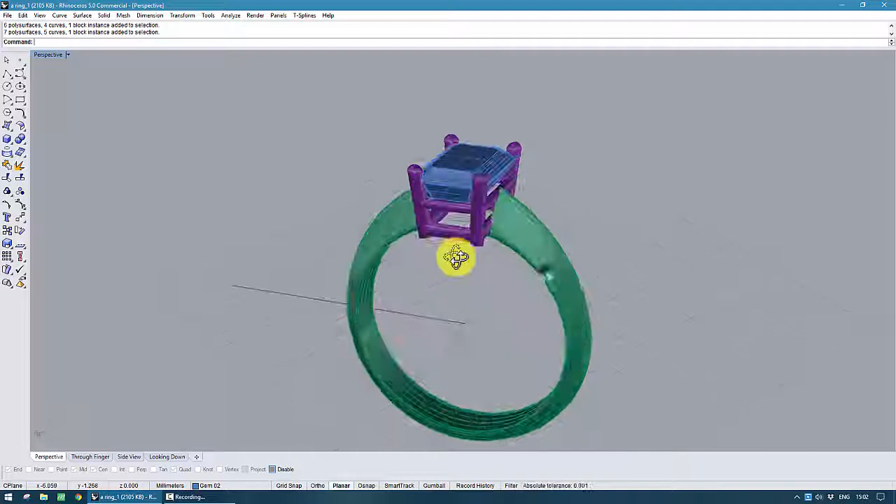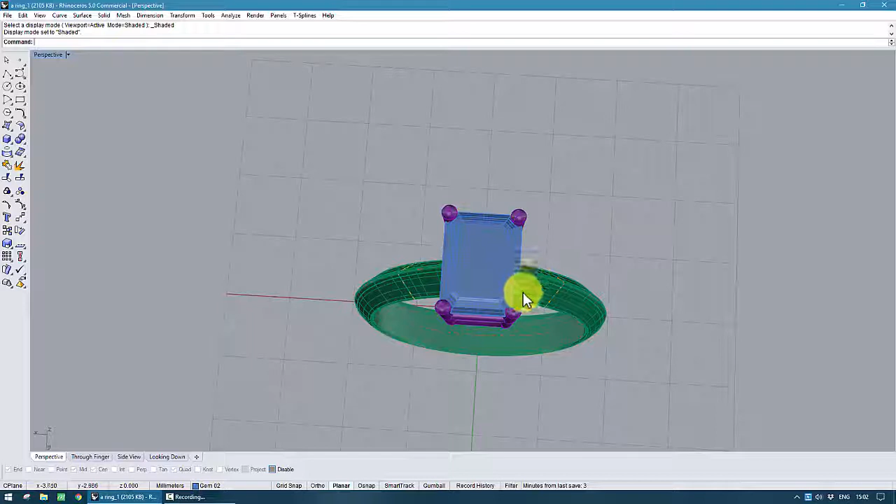I found this CAD file on a website. You know there are websites where you can download files for free, and someone was selling this. As I said, this is not a CAD tutorial, I'm just using this file. I actually bought it because I want to show you how a bad ring looks. This is not about whether I like it or not.

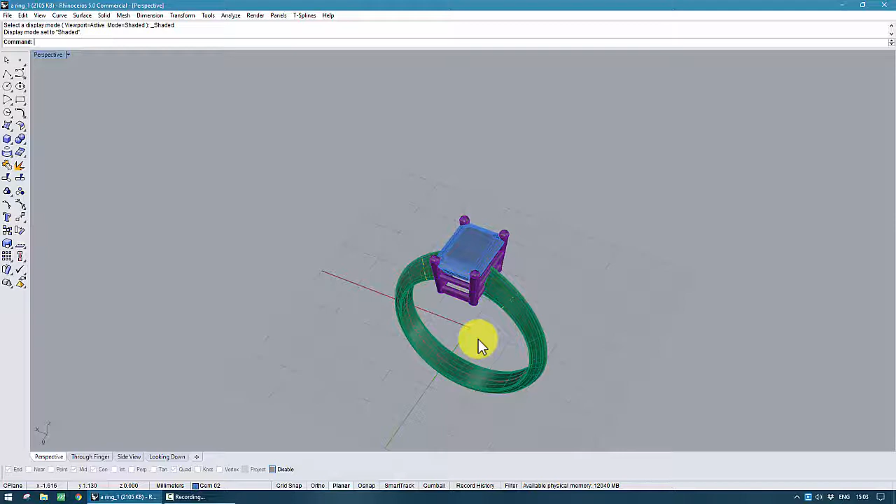The video I'm gonna make today is from a technical point of view - why this ring, in my personal opinion, is wrong. I'm not criticizing anyone's work, I'm not gonna say who did it, I'm not gonna write down any names. I don't know who did it actually, so it doesn't matter. Why do I think, and again this is my personal opinion, that this ring is wrong?

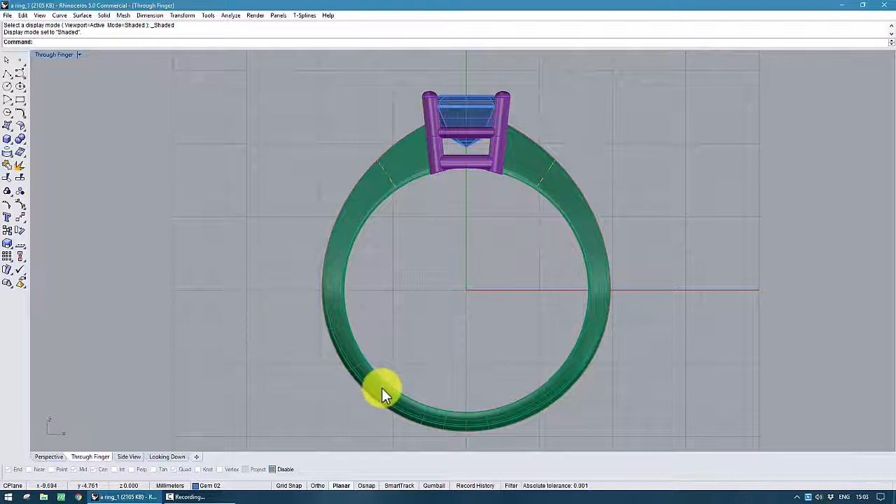Several things. First of all, if you look at the shank, it's not the first thing that is wrong, but you can see that it's very thin. This file I assume has been done in Matrix because of the gems layout. It doesn't really matter, as I said, this is not a CAD tutorial. I'm just using Rhino because I got this file in Rhino format, so I could use a whiteboard to show you.

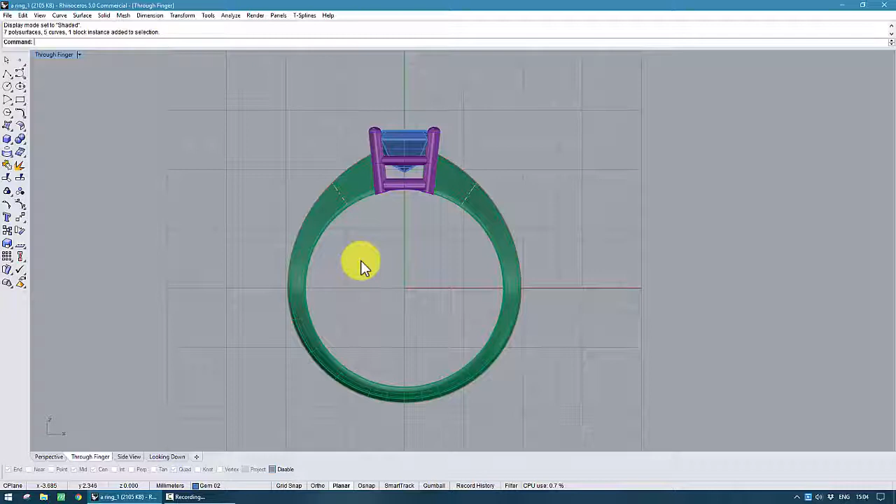Why do I think it's wrong? First of all, as I said, the thickness of the shank. Let's measure this - line dimension. Let's see, this is 1.3. Right, 1.3 on the CAD is gonna be 1.1 once it's cleaned up and polished. So in my opinion, it's too thin.

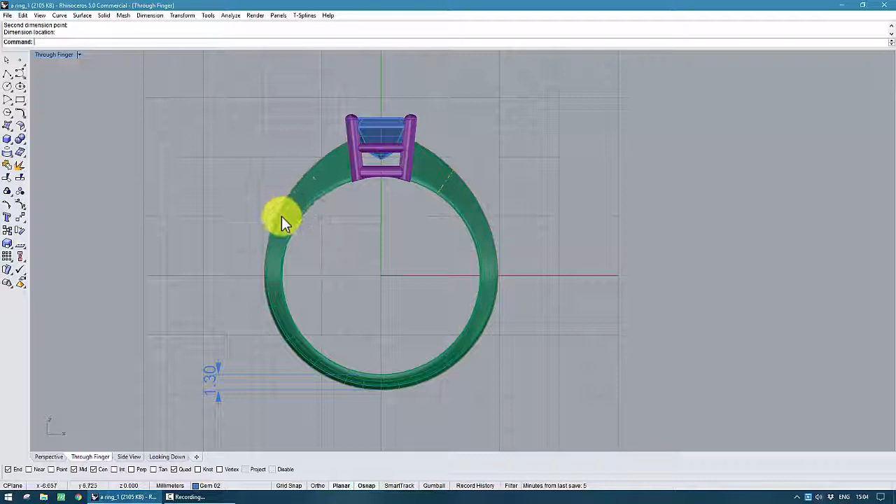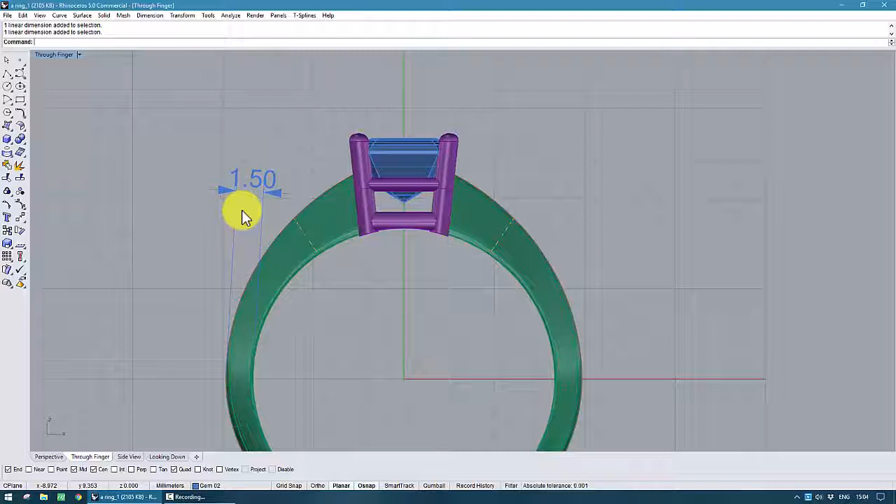If you check the sides, 1.5. Again, 1.5 is going to end up being 1.3. I usually would not make it less than 1.5 on the final piece. So when I made the CAD file, I tend to use 1.8, some 1.6 I would consider thin already. It's not like super bad, but it's too thin anyway.

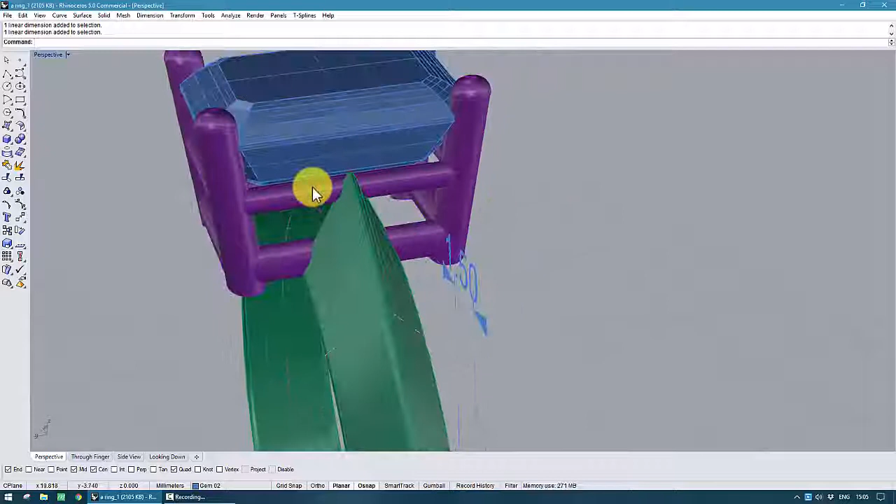What else is wrong here? You can see the way this joins to this, it's just too thin. Overall the whole model is flimsy, so this setting is just too thin everywhere, so the stone is not really secure. It's quite likely that the setter might not even be able to set it properly. If you see the claw, it's like too far inside the stone.

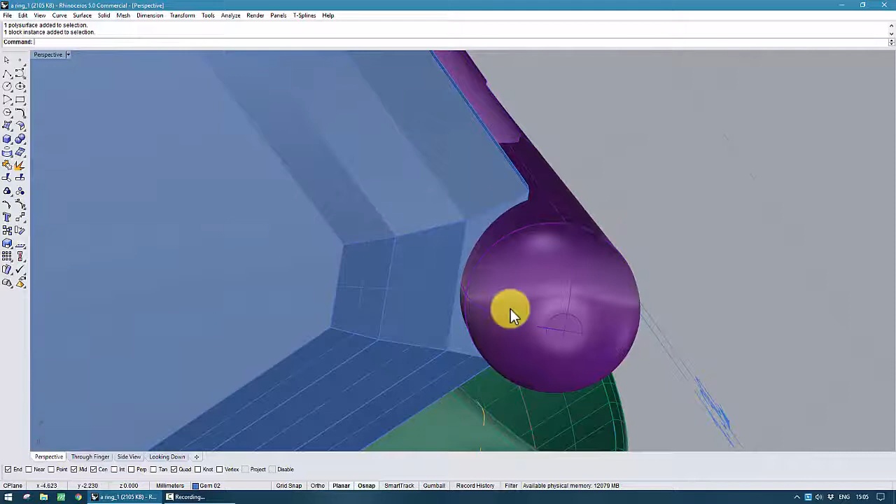It doesn't need to be. Like that should be fine. You have to bear in mind that the metal contracts, the ring always shrinks a little bit. So this is usually how I would do it. Like that is way too much.

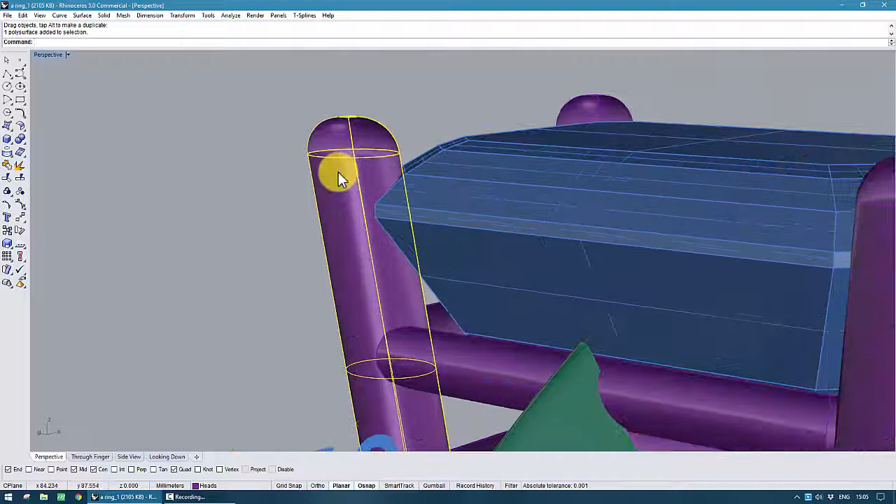The problem you could find is that once the setter is setting it, the setter needs to remove a lot of metal. So once the setter is setting the claw, you will end up with a little bump here. So that's just not nice, it shouldn't be like that.

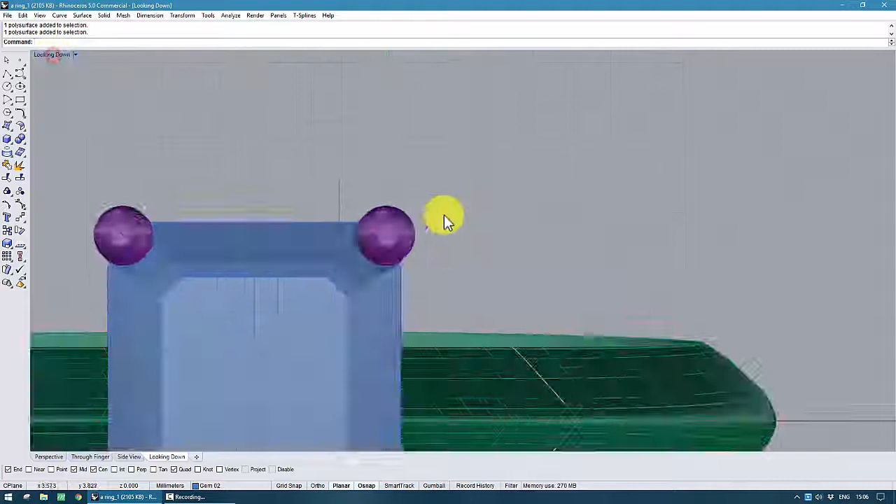The thickness is alright, I think that's gonna be like 0.8 or something like that. Dimensions, line dimensions. 1.1, so it's alright. In terms of thickness, it's alright.

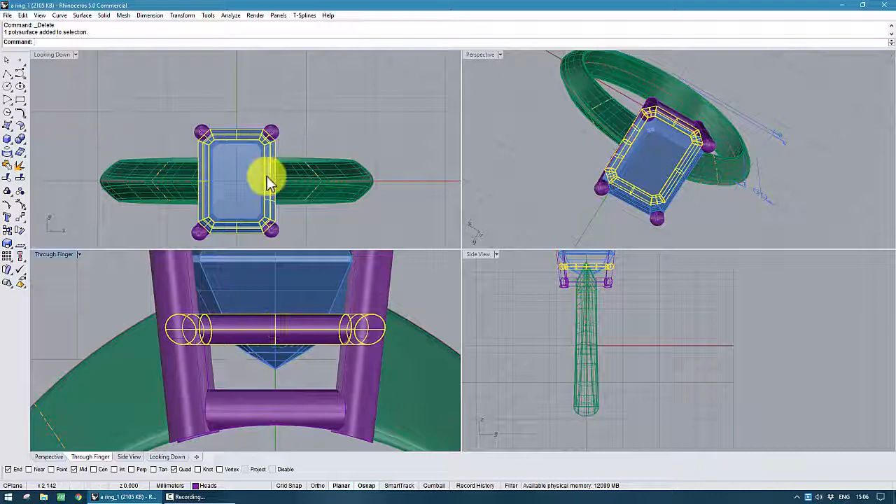What else? We talk about the thickness - when I was on perspective, this way should be a bit thicker, but it should always be thicker this way. So I'm not editing the file properly now, I just want to show you what I would change. This should be thicker.

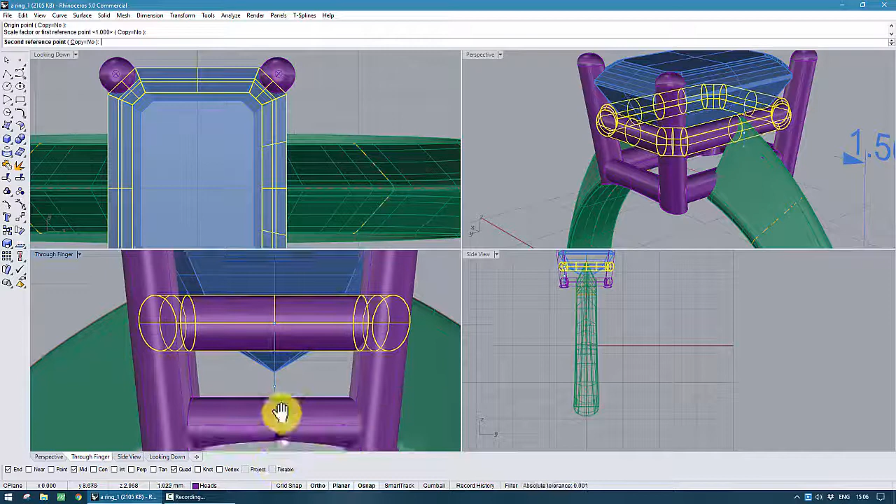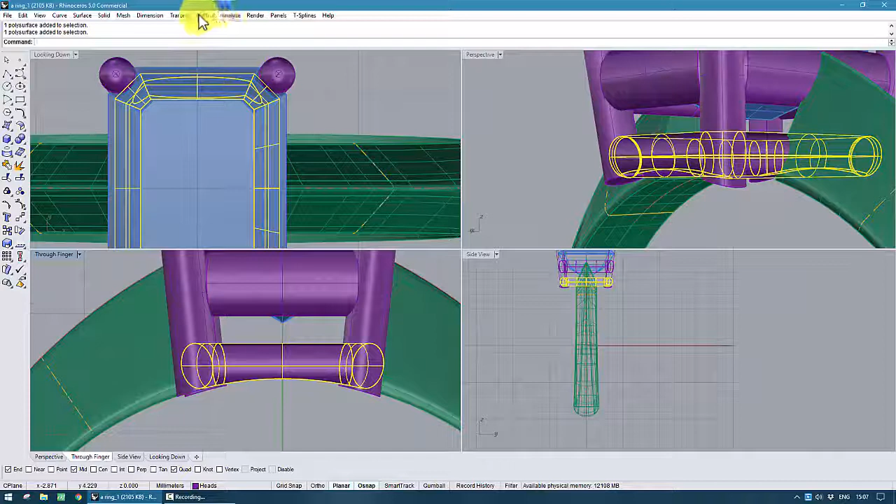I tend to make it quite thick and I tend to make it straight. You could also make it round, it's possible, but it should be thicker. And this one, it's not really bad, but at least here it should be like 0.8, and something tells me that this is gonna be a bit thin. 0.8, just about right, but still I would also make it a bit thicker, and I would not make it round - I tend to make it straight.

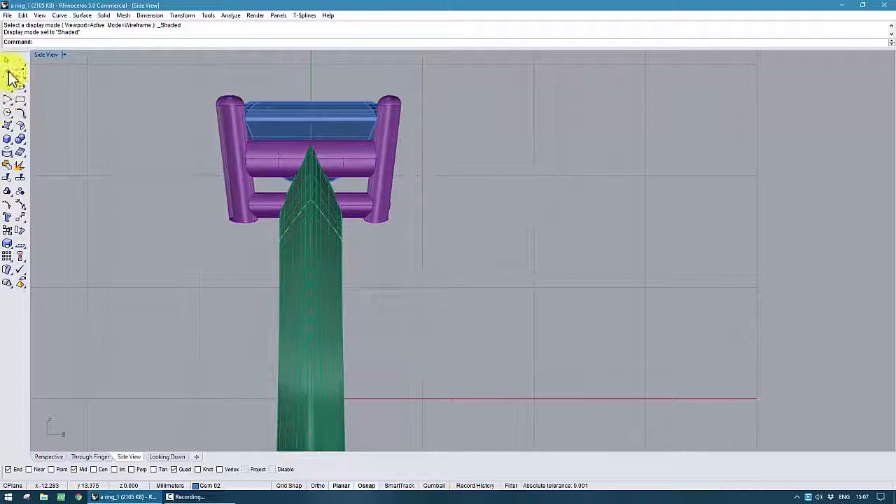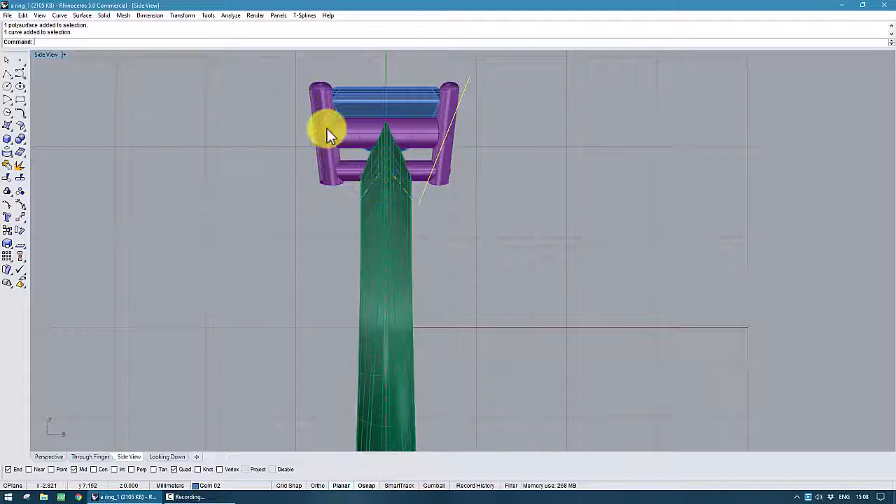Also, if you look from the side view, the setting goes pretty much straight down. Ideally this should go like that, at least more of an angle. This claw goes very straight. It's not that it will affect the manufacturing - you'll still be able to print and cast it - but it's much nicer when you look at it if the setting is tapering towards the shank. Also, I would make the shank a bit narrower.

I might remake the whole ring later myself.

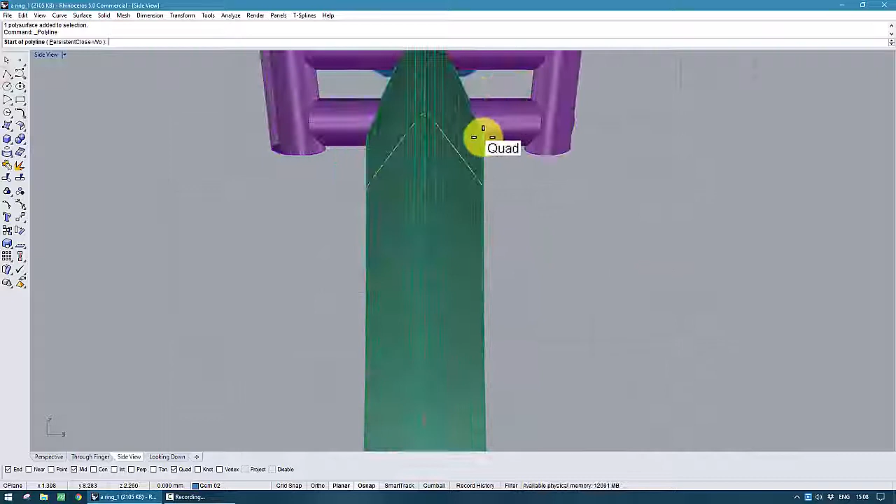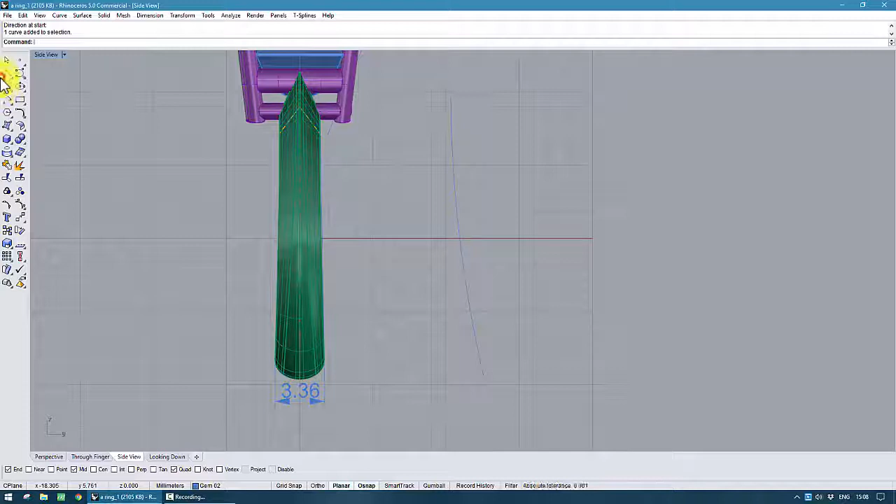So it's alright. Also the taper - if you trace a line from here to here, you see you have an empty space here that you shouldn't have. It's not going straight. I'm exaggerating now, but it goes a bit like this, which it shouldn't. It should always go straight.

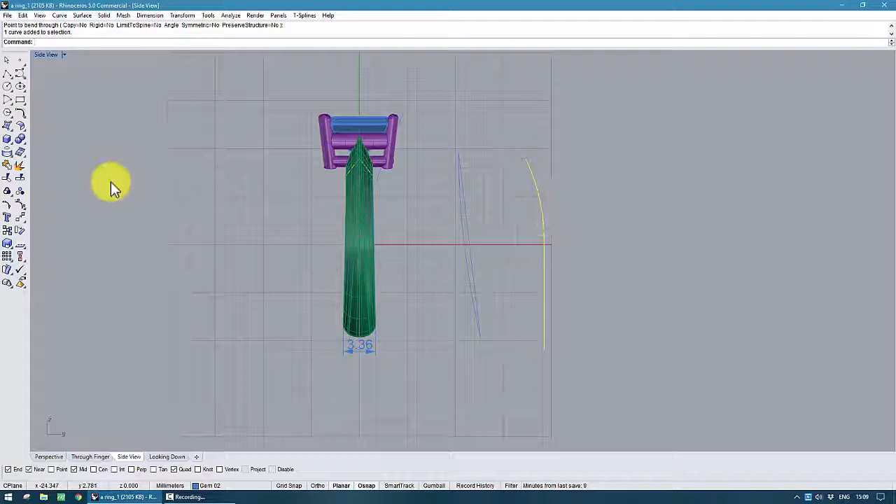There are many ways that you can make a shank. You could always make it instead of like this, like this, a bit like this. I'm not showing step by step how to do something.

As I said, this is not a CAD tutorial. I just want you to understand why, in my opinion, this design is wrong. So as I was saying, this shank at the moment goes a bit like that - it's curving in, which shouldn't be like that.

You could make it either straight, probably not so straight, probably more like this, or like this, but not curving in like that.

Another thing, the shape of the claws - technically it's possible to make it round. You could also, this is like my suggestion, it's not that it's wrong, but you could also make it a bit like this.

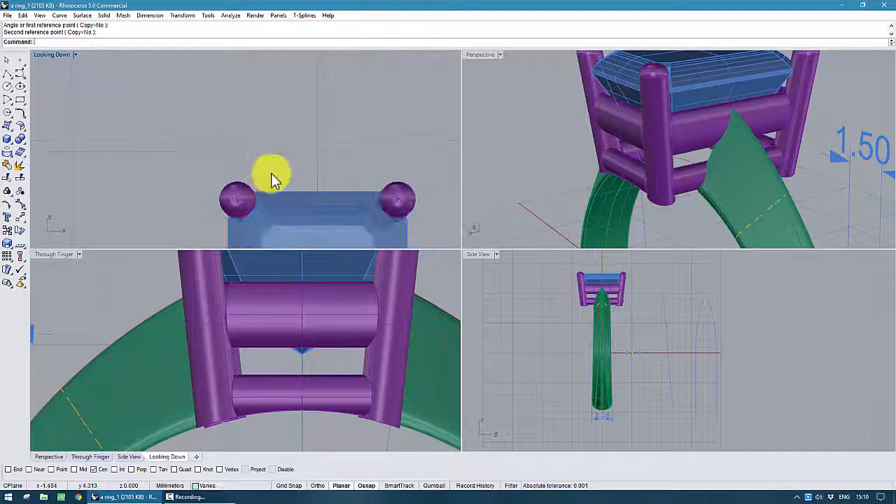Something similar to this, so it looks a bit nicer once it's set.

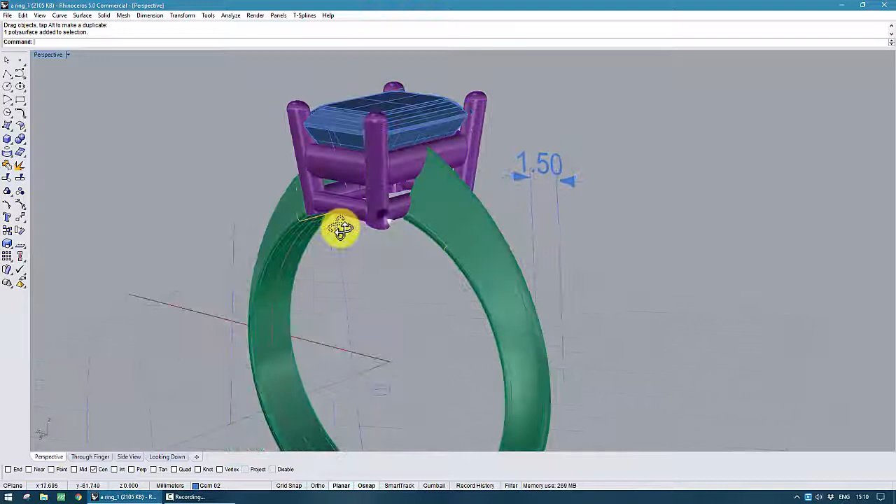What else? As I said, the way this joins with this, you cannot have this. You can either make this in one part or in two parts, but what you cannot have is this.

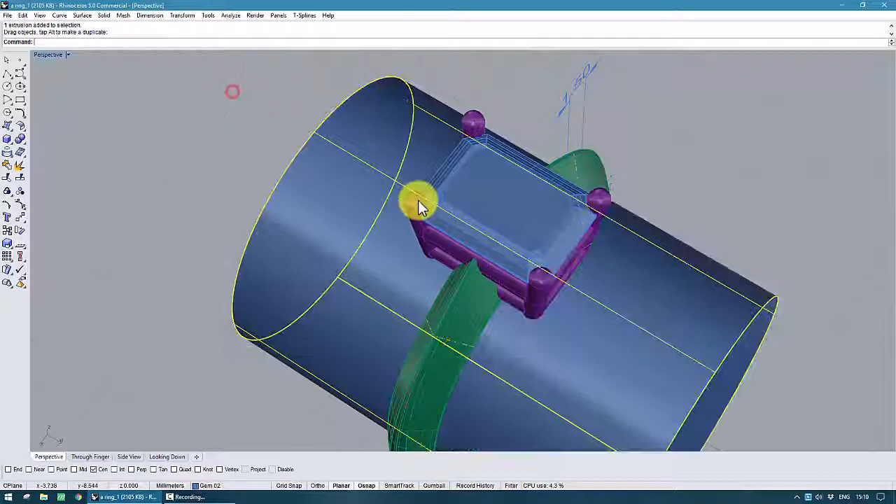It would be a bit better, slightly better, if this was a bit lower, and then you just chop off the whole setting like this. If you just chop it off like that, it would be better.

Still, it would be wrong. Could be improved substantially, but it would be better.

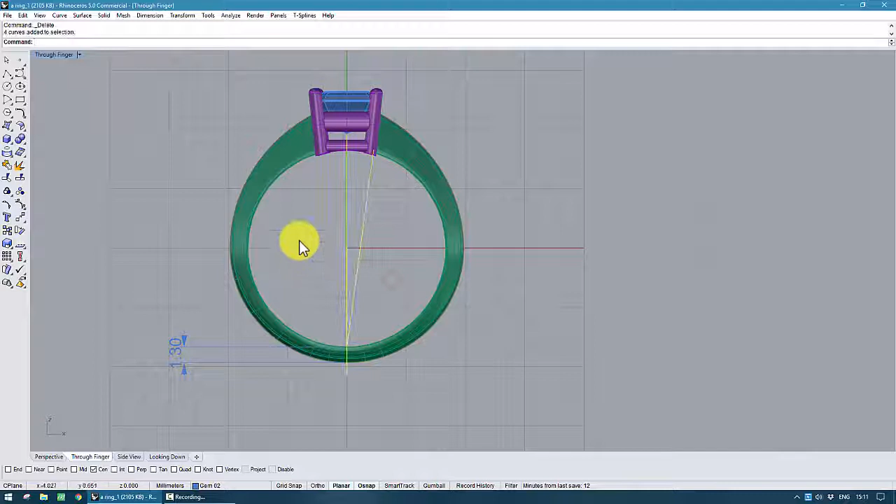What else? Well, the main thing I wanted to show you is the thickness of the whole thing, especially the shank. I'm gonna make another video now. I might put both videos together, showing how I would make it.

Again, this is not me criticizing someone's work. I just want you to understand why this design would be wrong.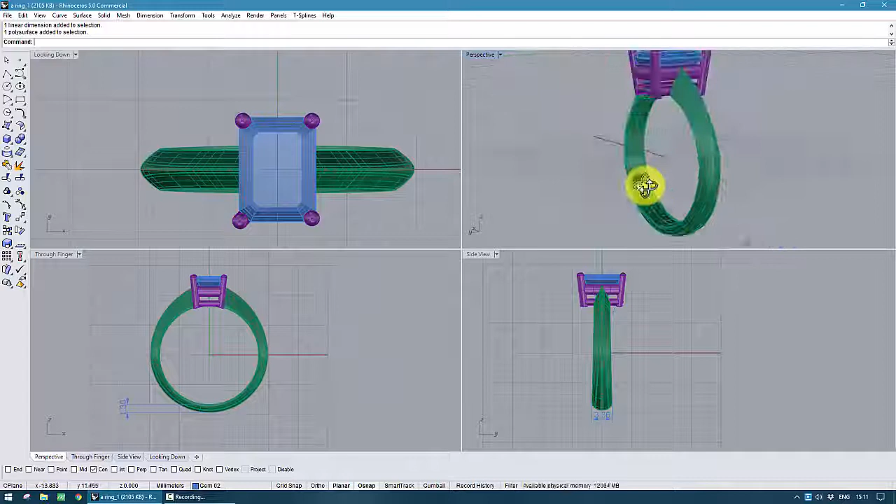On the very top, well, no, it's quite alright. I was about to say I thought this would be sharper. Well, of course, this is wrong. You cannot have this.

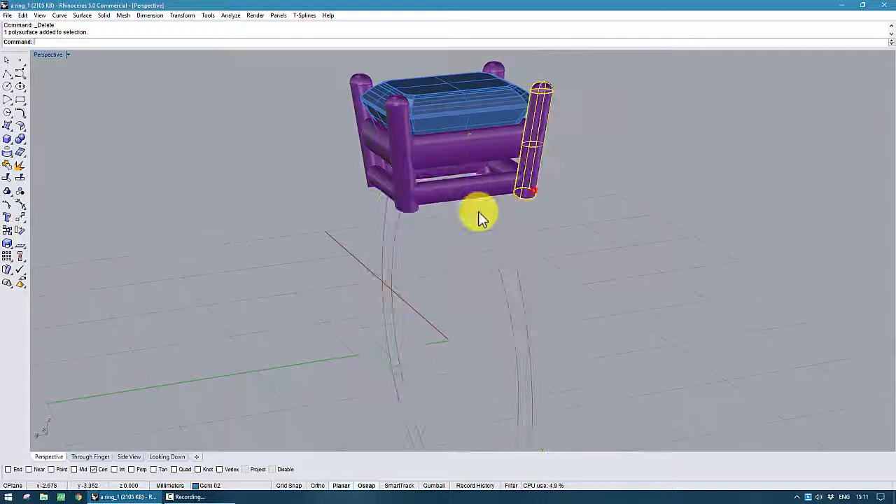You cannot have a little gap there. It should be joined together. But what I was about to say - some people, not in this case, but in some models, I've seen people doing this.

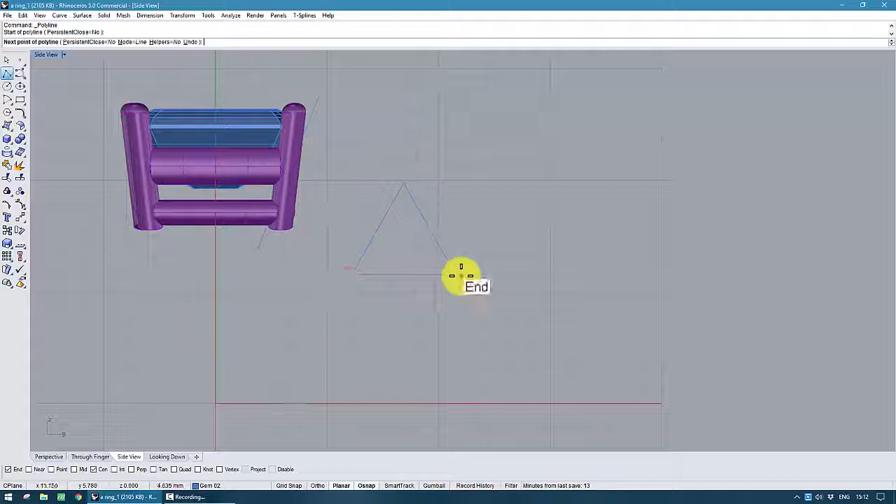When you have a triangular profile, you cannot make an exact triangle. If you have a profile like this, I'm just gonna make something simple - I'm gonna make this as a band, just to show you.

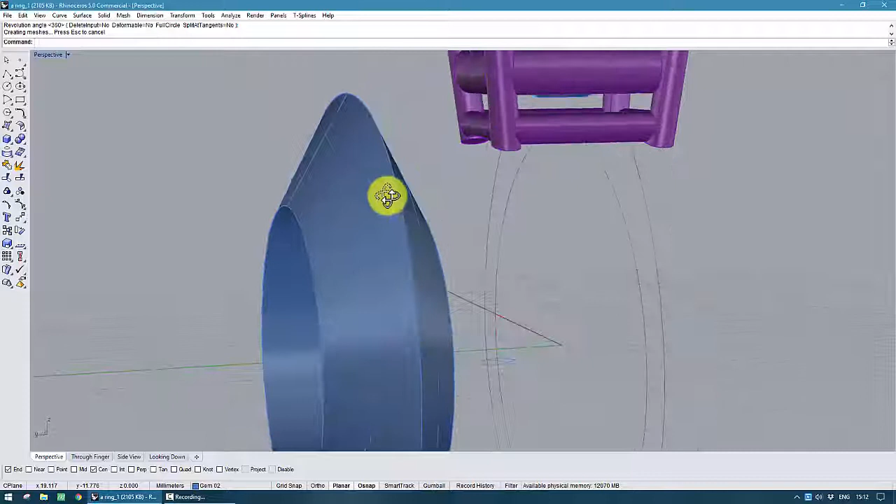Imagine that this was a ring, which it obviously isn't, but imagine that this was a ring. You cannot have edges like this, basically because they will just wear out - it's gonna go very soft. The edge is too sharp.

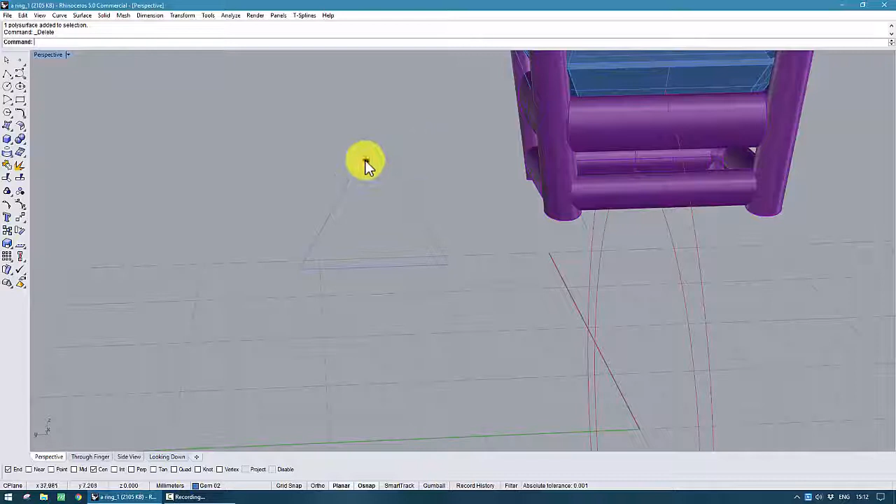So if you make it like that, it's gonna start breaking. Even on the wax, when you print the wax, it's gonna break apart. So if you have to make a triangular profile, what you would do is this.

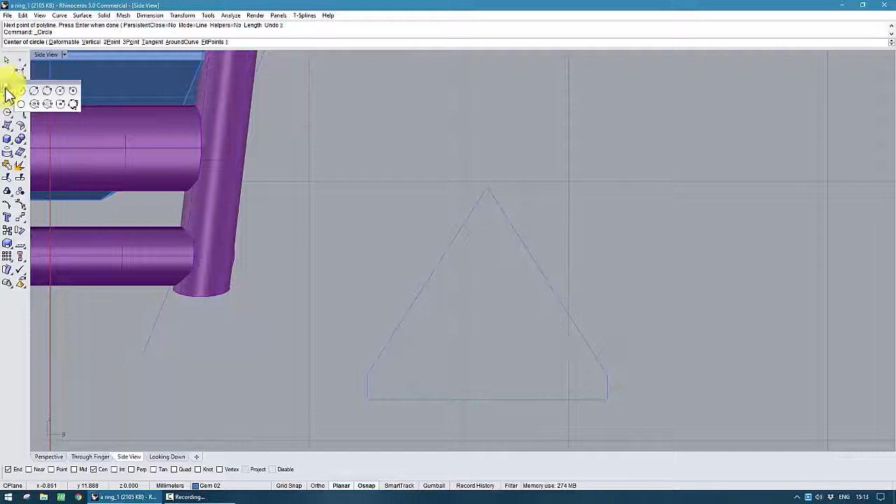You always have to allow a little flat on the sides, and on the top you could just make a fillet - maybe not that much, just a tiny little fillet, something like that.

This would be a triangular profile. If you make an exact triangle, it's just not gonna work. Let me make it look more like a ring.

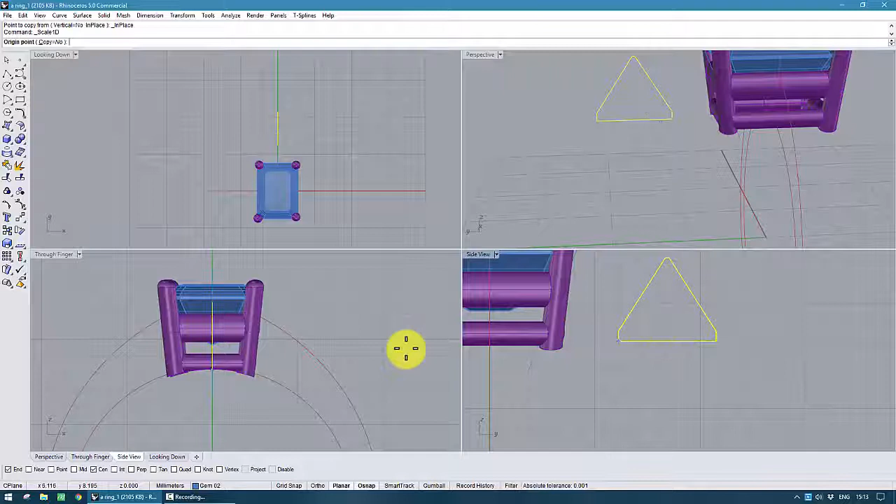Okay, so now if I turn this into a ring, this is how a triangular profile should look like. I'm aware that this is not a ring, but this is how a triangular profile should look like.

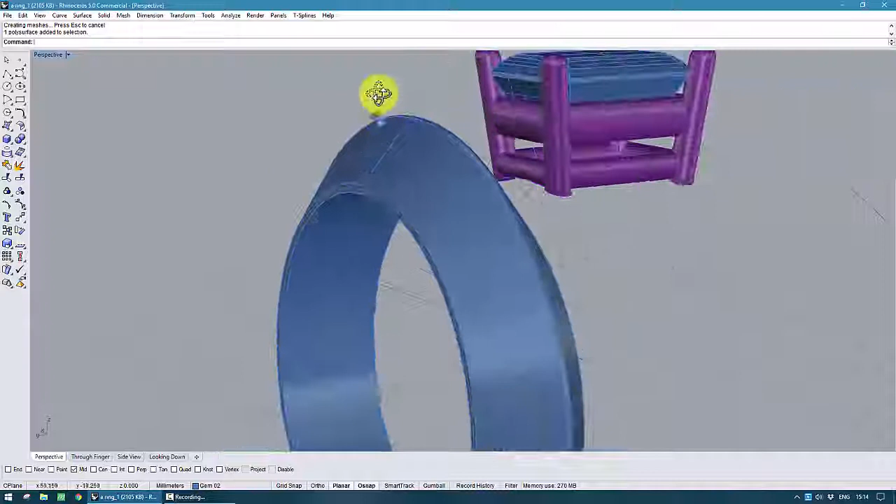Here should be 0.6, 0.8, I don't know what it is now, but you need a bit of a flat. So if you have an angle like this, it's fine, it's safe, but you cannot have it like what we had before, because it just breaks apart.

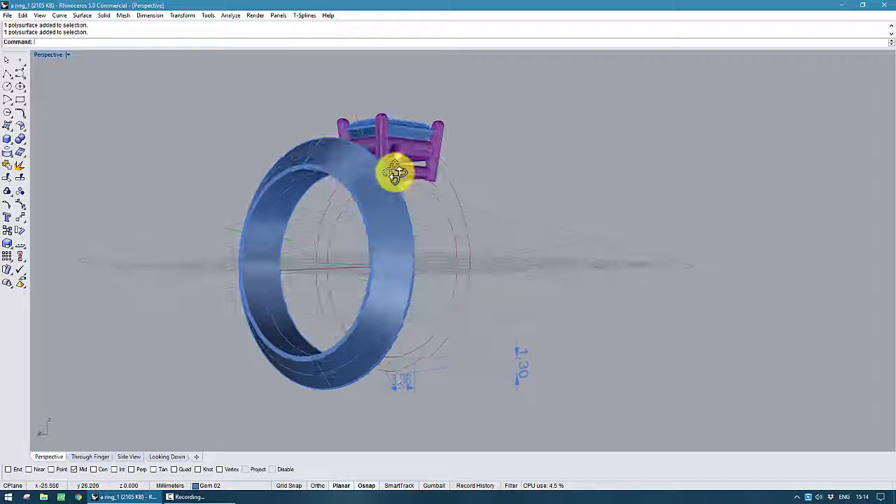What else? I think that's pretty much it. I don't want to sound like I'm destroying someone's work, but I just thought it would be interesting for you guys to know.

Okay, so following the previous part of the video, what I made is I basically edited the ring. Well, I made it from scratch basically.

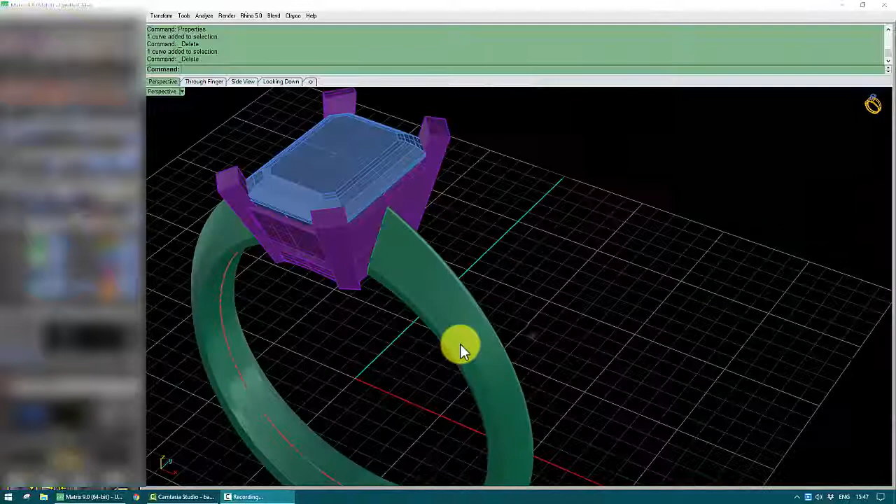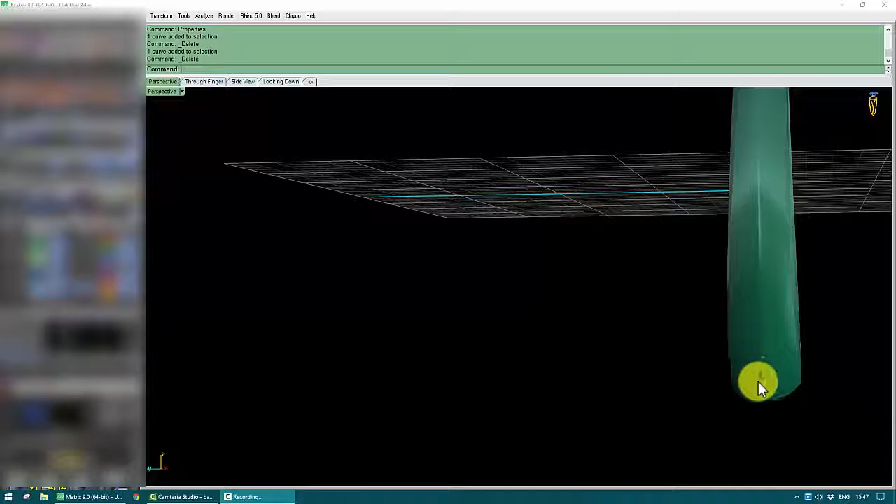This is one way to do it. There are many different ways. The only thing I'd like to make sure you see is what I've done here. You can see the shank, still D-shape, but allows a nice flat shape on the side. Also the claws are a bit thicker - well, actually a bit thinner, but more squarish. For emeralds it tends to look a bit nicer like this. I could have also done a 2 round double claw.

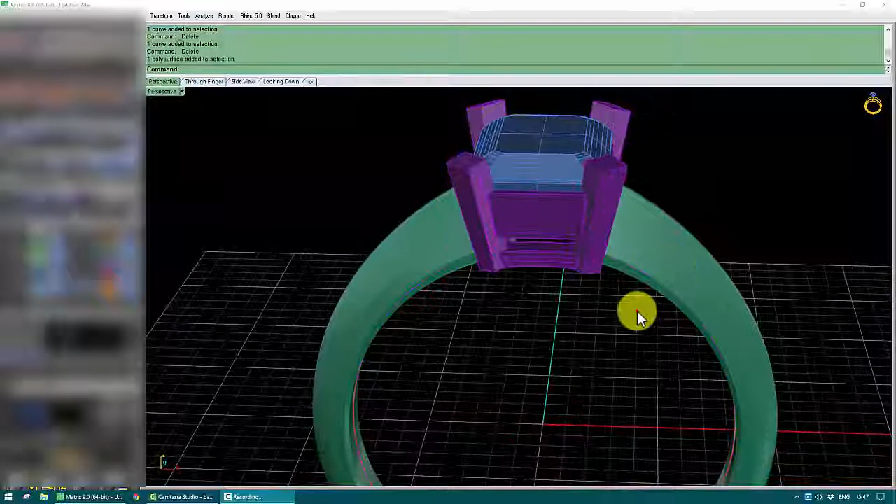I did also the ring to be conceived in 2 parts, so you can make the shank in yellow and the top in white, or whatever you want. This, I tend to make quite flat always.

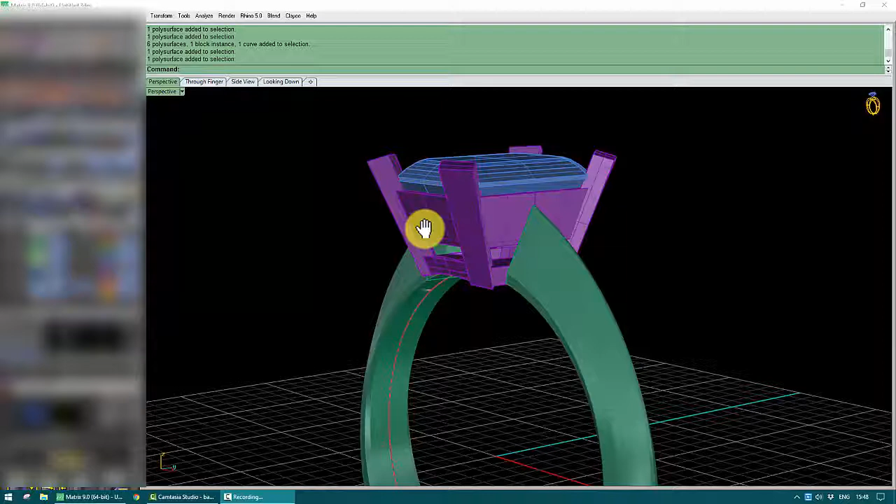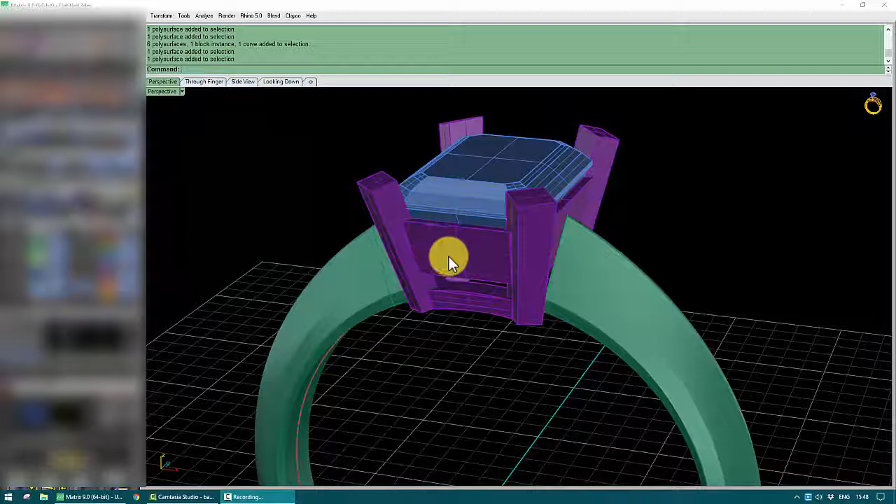My advice would be, if you're gonna use a polisher, the idea here is that if you make it flat and your polisher does it right, it's gonna look amazing. In my opinion, it looks better if it's straight. If you cannot polish it so well, just make it round, because it's gonna look better. It's really bad if you make it straight and you polish it really badly, or clean it up very badly. So it's really up to you.

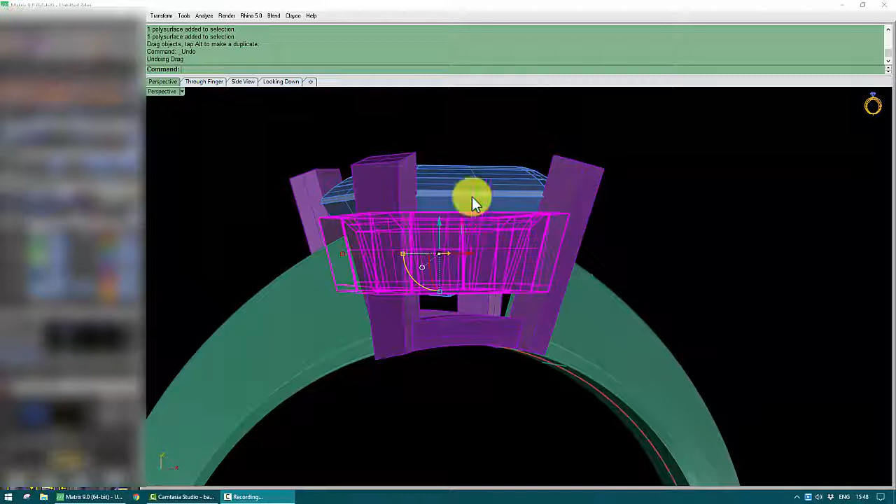This is one way to do it. This is 0.8 because I tried to keep it similar to the original design, but in my opinion I would make it 0.9 or even 1 mil. This gap is also 0.8 - could be a bit more, could be a bit less, doesn't really matter. This under-bezel, under the stone, I tend to make quite thick.

Something a bit thinner would still be right. Maybe something like that. Some people might bring the claws a bit in - I think they are already quite in, but it could be more.

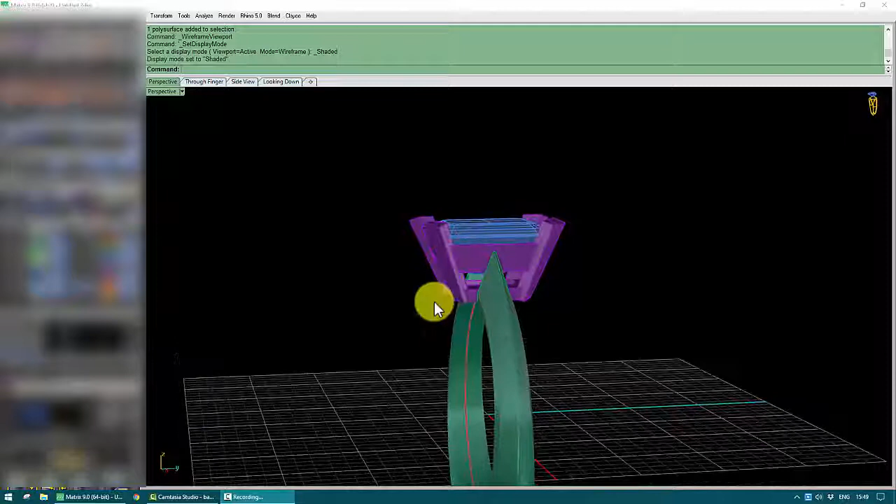Also, the thickness of the shank and the shape of the shank, I try to keep as similar as possible to the original one, but I would not make it like this - I would make it differently. But again, that is my personal opinion.

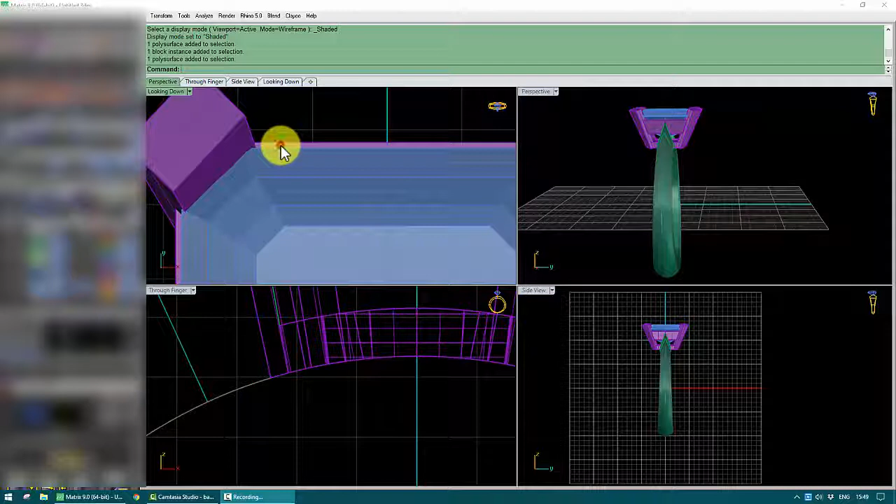Also, as seen from the top, I allow a bit more metal around the stone. That's to allow for cleanup and polishing. Usually, if you make it exactly the same size as the stone, it will end up something like that, underneath the stone - so you don't want that really. It doesn't look nice. So I always make it like 3-4% bigger than the stone.

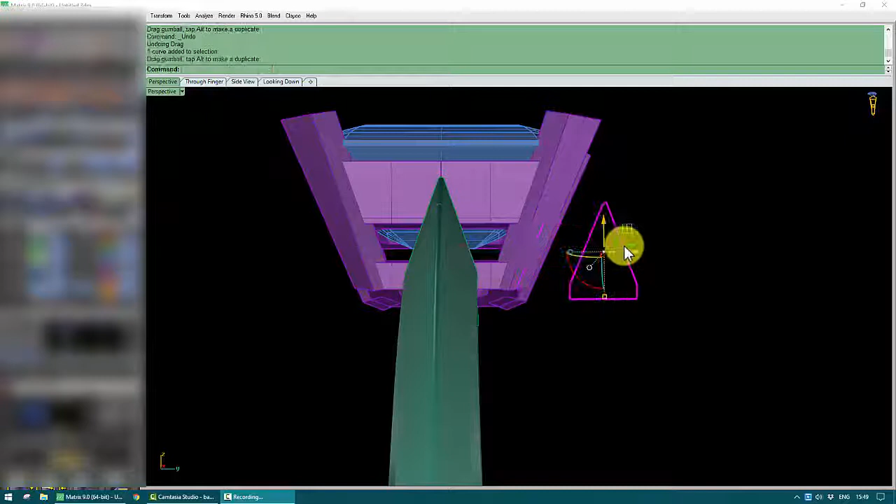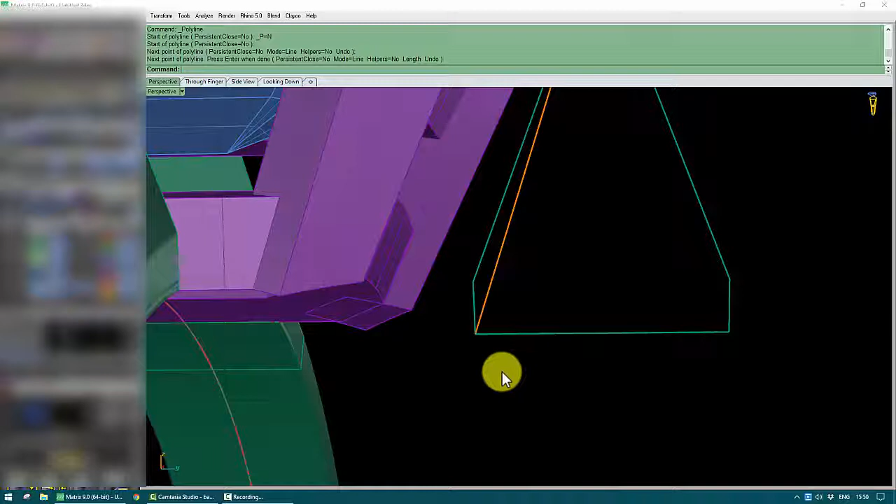Also, the shank has this profile. As I said before, I think you need to allow a bit of a gap to avoid having an angle like this, because if you have this angle, this corner, it gets battered, it gets destroyed - especially if you're working with soft metals like silver, this is gonna look really bad. So if you make a 90-degree angle, you can prevent that from happening.

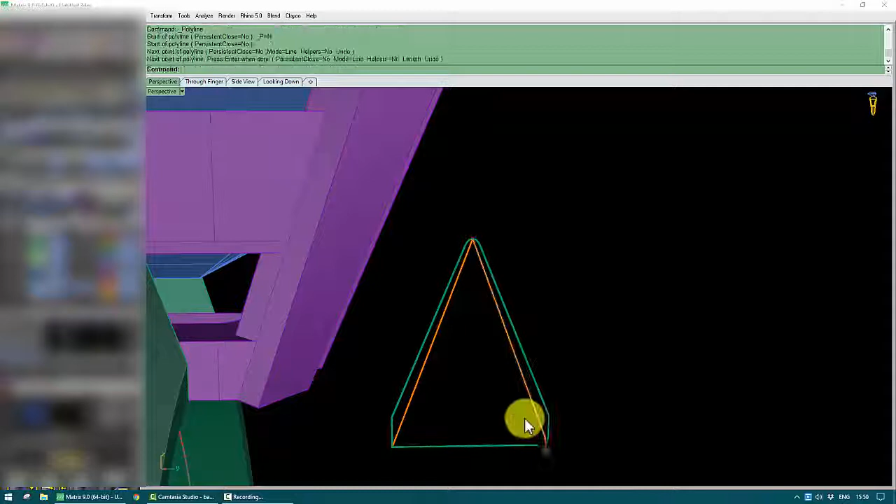Also on the top - before, I think the guy who made the first model did it right, but some people do this. This is very wrong, because this edge will never be like that. It will be like that on the CAD file, but not even on the wax will it come up like that. It doesn't matter which printer you're using, it's just wrong.

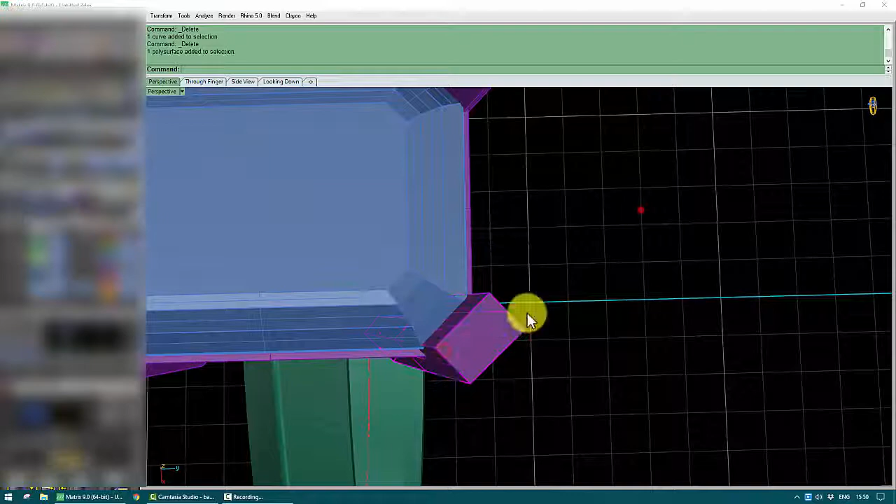Yeah, the claws, I made them squared. I'm not very convinced about that, but that's just one way to do it. And again, these parts fit together in case you want to make it in two metals. If I was to print this, I would put a bridge here for casting.

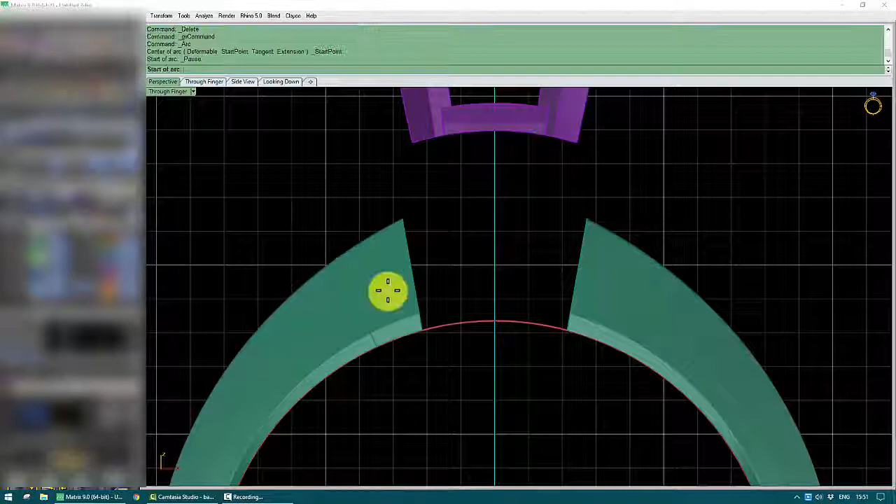Let me just do it something like that, just to prevent tensions in the casting.

And that's pretty much it really. Again, this video is not supposed to be a CAD tutorial. I just wanted to show you why certain rings look certain ways - it's not because of aesthetics, there's a reason for that. So these are some of the reasons.